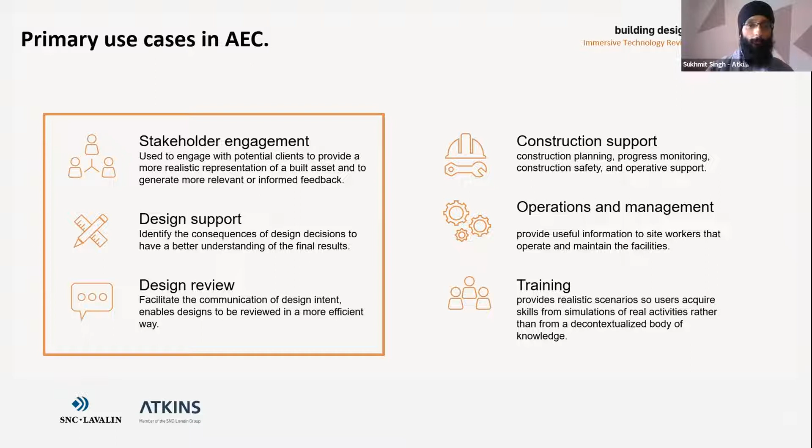So starting off on stakeholder engagement. This has always been an interesting one, where traditionally we would previously use lifelike renders, we would use headsets to try and get the clients or the stakeholders into the room and essentially show them their building or show them their project. But where we started really seeing a lot more value was the use of AR, augmented reality.

And this was because of increased accessibility. It meant that the stakeholders, the users weren't limited to having to wear headsets. They could use their smartphones, their tablets to interact with these installations or with these elements. And then what we could also do is take them beyond just those 3D visuals and renders.

Through the use of QR codes and other markers, we're able to showcase what lies underneath certain graphics. And we've actually seen great success with this interacting with children at schools or during STEM activities, where once again it's not always possible to have them wearing headsets, and what we can do is provide them with tablets where they can interact with characters, interact with other imagery, and understand more around what's going on, why you're making certain decisions and how it's going to impact them.

And it becomes more of a tool for conversation rather than a one-way, 'oh, this looks good and I like it,' but more about what's the level of depth of information sitting behind the graphics and behind some of the design decisions we may have made, and how we can connect those to the students, to the faculty, to other users of the buildings and the projects.

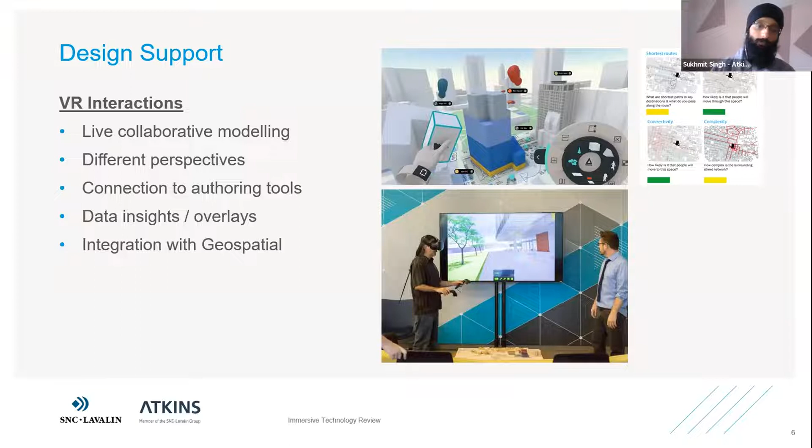Just moving on from design support into design review. We often see a crossover between design and construction, and even during the design process there's this continuous feedback loop that we want to create, being able to leverage cutting edge technology in terms of how we want it to move forward, how we want it to impact our decisions, and how it integrates into our workflows. So with our design reviews, it's a case of being able to author our designs in certain applications, bring that into virtual reality.

And as I was mentioning earlier, being able to bring in different overlays of data, whether that could be Google Images and satellite views, whether it could be OpenStreetMap and some of the site context around that.

And also being able to interact with it, not just from a modeling perspective, but from a comments and communication perspective. So being able to mark up in these environments, being able to draw in these environments and actually share that visualization to ask questions of the design, ask whether it's the right decision we've made in terms of certain heights or certain placements.

Making sure that we're not just seeing this in a 2D realm on a PDF drawing, for example, and we're not just flying around a 3D model with not much aim and not much context around it, but really bringing in those layers of information that can definitely change our decision-making process and change what that end result will look like from a building perspective.

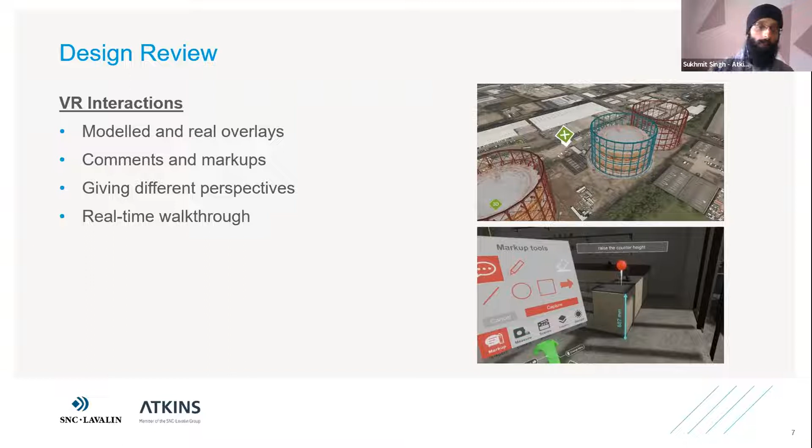What this leads on to is this final bit around the technology and the data that sits beneath all of this. One aspect is the visualization and being able to model and comment, but a key element is really around data collection.

One of the things we've been experimenting with and putting into play over the last couple of years is how can we simulate different scenarios and typologies, use this to understand user experience, and then be able to record this and integrate it into our analysis.

An example of this is we ran on some of our own offices, changing certain aspects of our office layout - whether that was around the desks, the lighting, or certain positioning of furniture - to capture feedback of how a user would feel about this.

So making sure that they feel immersed into that environment, making them feel like they've got a connection to that environment. Rather than asking a plain question on paper or as part of a conversation, it's more about asking a question while they are experiencing that space.

And that really changes their perception of what they want and what they feel they need out of that space. It also changes the way we engage, because it becomes a data-driven approach rather than around narratives, which means we can incorporate that into our design brief and our analysis, and really understand the impact of what's going to happen.

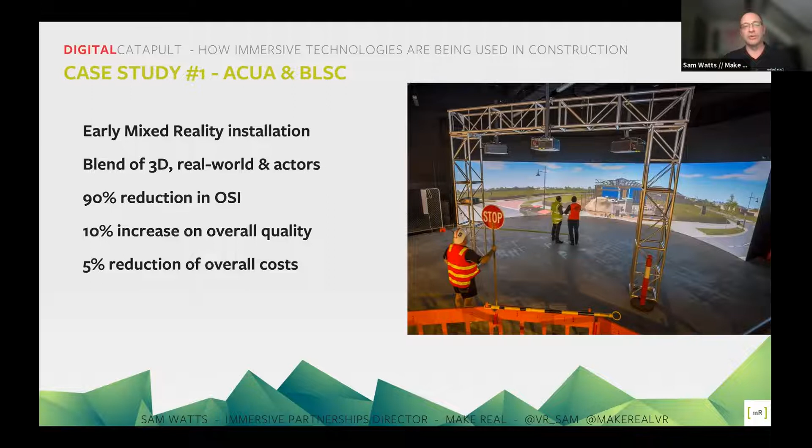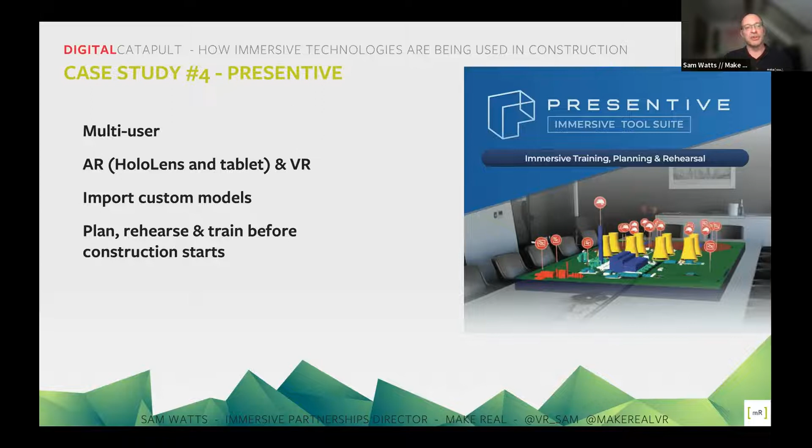And using the HoloLens, you can then bring one-to-one, life-size assets onto your construction site to plan and prepare, to make sure you've got enough room on site.

And that's pretty much me.

Wonderful, thank you so much, Sam. That's brilliant. It's amazing the diversity of projects that Make Real have been able to contribute to over the last few years—a real eclectic mix there. Thank you ever so much.

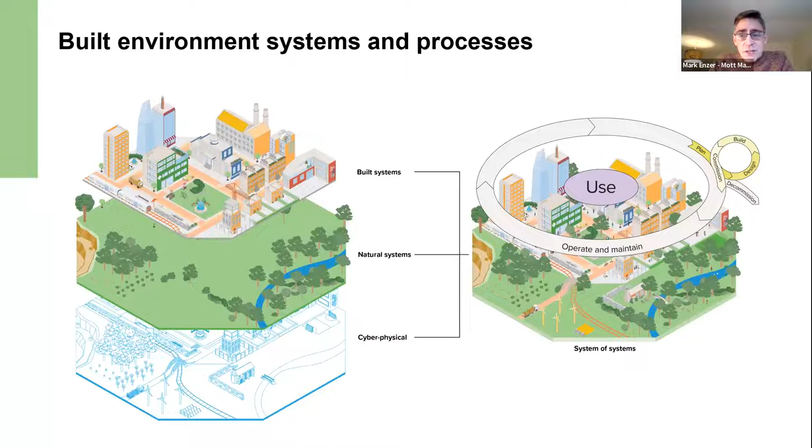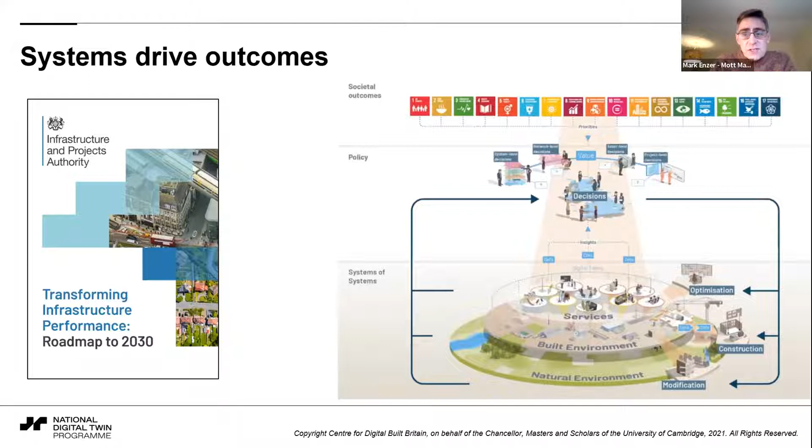The reason for outlining this, I hope, will come clearer later in the presentation, but I want to emphasize this isn't just highfalutin visionary stuff — it's built into policy now. I'd commend to you the Transforming Infrastructure Performance Roadmap to 2030, if you haven't seen it. It builds in the idea of an outcomes focus, recognizing the systems, understanding how important information flows are, and seeing that if we get that information flow right, we can make better decisions driving towards better outcomes. Having that bigger vision leads to something really practical — it lets us see that these interventions do really matter, but as part of a bigger picture.

A key enabler to get us to that point is about going cyber-physical. It's recognizing the value of these digital worlds we have access to through XR, and recognizing that the metaverse is a real thing — the sum of all the digital worlds. We can do something at the useful end of the metaverse, and to get there we need to do some digital transformation.

That digital transformation is really all about enabling people. It's got something important to do with managing information better, to make better decisions — that's key to unlocking the value. But it's also about transforming the processes we see across the built environment, and applying and integrating technology wisely. That's the big picture context of where XR fits into construction, and where construction fits into the built environment. This integrative picture really helps us get the best out of technology, because technology without a purpose is just a toy.

Starting now to dig into my second piece, talking about cyber-physical in construction, is to recognize how very important information is — information is really the carrier of value. Lots of people complain about there being too much data around. What I'd argue is maybe there's too much data, but too little insight. We have to take our data, do something clever with it to generate insight, use that insight to make better decisions. The better decisions drive better interventions, and the better interventions lead to better outcomes. So this information value chain is super important.

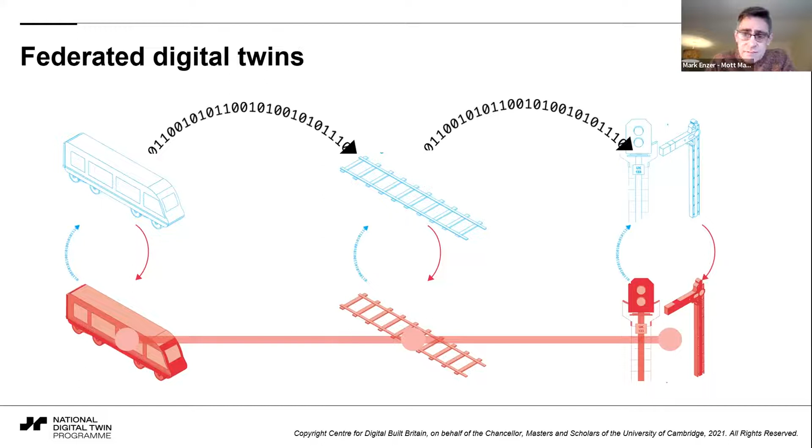And when we add it all together, back up to the system level, we can see how these many different digital twins can be federated, can be joined together as part of a wider cyber-physical infrastructure to help us understand our systems better and intervene more effectively.

Now, that really matters at a system level because an awful lot of the challenges we face just now are system level challenges, like achieving net zero, like achieving climate resilience, like achieving circular economy. All of these are system level challenges that demand systems-based solutions.

So we have to see how things join up. And we can see, therefore, how XR fits into this, but fits into a bigger picture of technology that is integrated with a purpose, and that purpose really matters.

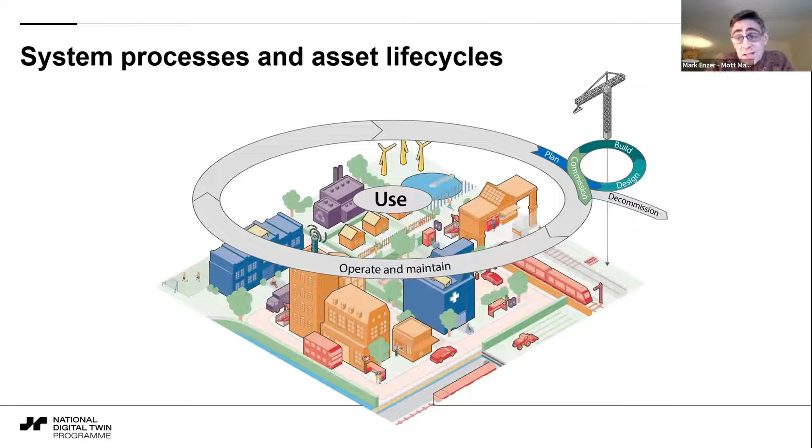And so on my systems point, just to emphasize that the design build commission is a really important part of the overall picture, but it's just part. It's like seeing the system, seeing the interventions on the system.

Okay, so let's get a little bit more practical for just a moment and talk about how on earth do you get this transformation to actually happen. And there's a real important why here, because pretty much every other industry has been increasing in productivity for a long, long time, but our industry unfortunately hasn't. So what do we have to do to get it up to where everything else is?

Certainly part of the answer is digitalization. It's not the whole answer, and digitalization isn't a thing in itself. It's always an enabler of something else that's more important, but digitalization matters. And we can definitely see where XR fits into this.

I thought I'd chuck in a few examples, because otherwise it's just highfalutin stuff. And you can see extended reality and machine guidance, operative training, site worker augmentation, or kind of verifying quantities on site—some really practical, useful stuff. But like I say, part of a bigger thing.

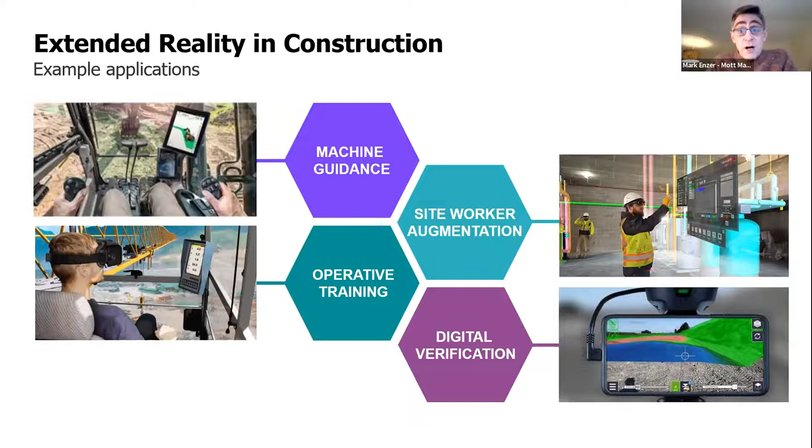And if we are going to get this transformation to happen across the whole industry, then yes, it's true that we have to push the front edge forwards. We have to keep on doing that. But that's probably a small part of the total that needs to be done, because there's the bulk of the industry that really needs to change.

And so what that means is that we need to translate that kind of front edge learning into something that is adoptable. So we need three things: we need to advance the front edge, we need to translate it, and then most importantly, I think, we need to get it actually adopted. And the biggest challenge in the industry really is about adopting the good practice that already exists.

And there is good practice, like the UK BIM framework, which could unlock so much value if it's just adopted more widely. Some very basic things like getting control of our data, being clear on information requirements, working with effective common data environments.